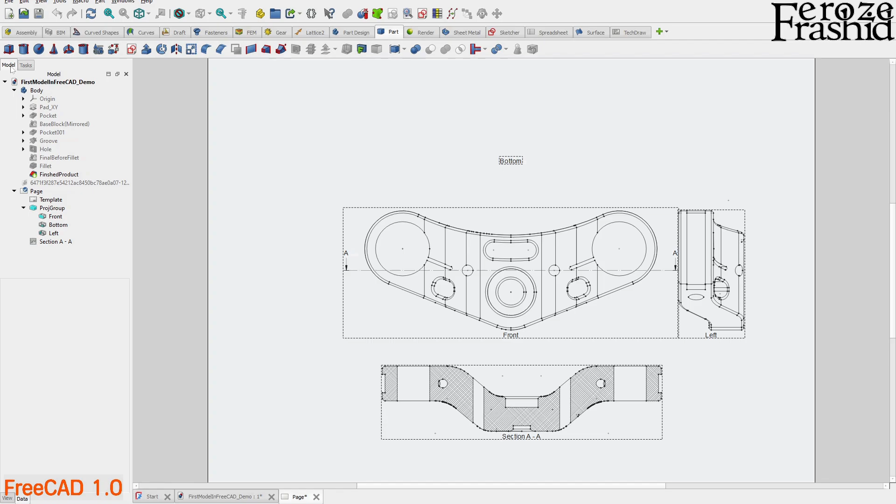Go to freecad.org/downloads and download your version of FreeCAD 1.0 for your computer.

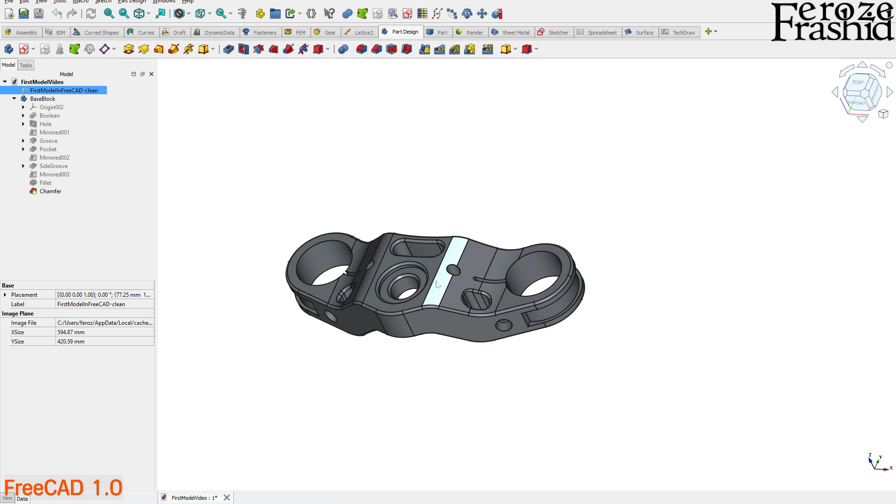Welcome back. So far in two videos we have discussed how to build this model. First we built two sketches on XY and XZ, on the top and front plane. We used the common area between those two extrudes, and then we applied some dress up features, and that gives us our final object.

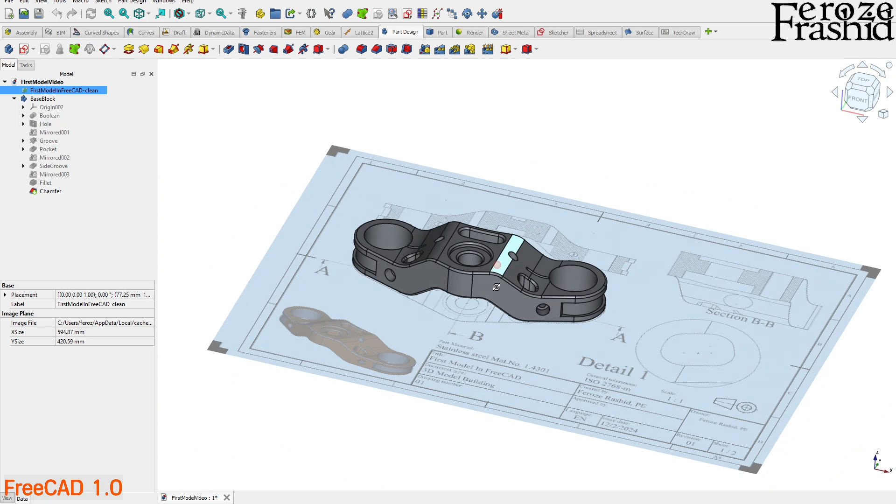So in this video, what I am planning to do is show how to build this technical drawing from the model that we just built. So first we used the technical drawing to build this model. Now, what if you build the model, you came up with this model, and then you wanted to document that specification in a document? So that's what we will be doing.

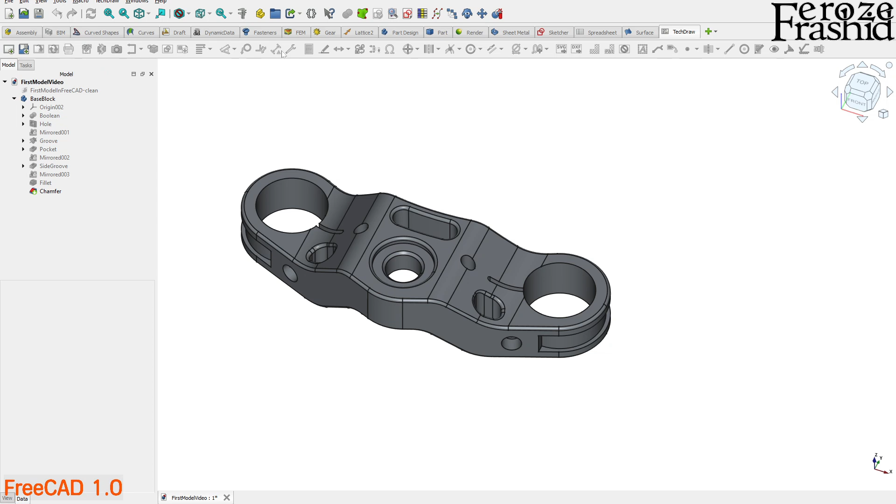FreeCAD comes with the TechDraw workbench installed in it, and that's what we will be using to build our technical drawing. The first two buttons in TechDraw: the first one says insert default page, and the second one says insert a page using template. So it looks like we need a page nevertheless, because the other buttons are grayed out. So let's start with insert a page using template.

So these are all the templates that come with the default FreeCAD installation, and those are saved in this location on your computer. So once you select your template, you can open it, and that will open up the page that we will be building our technical drawing on.

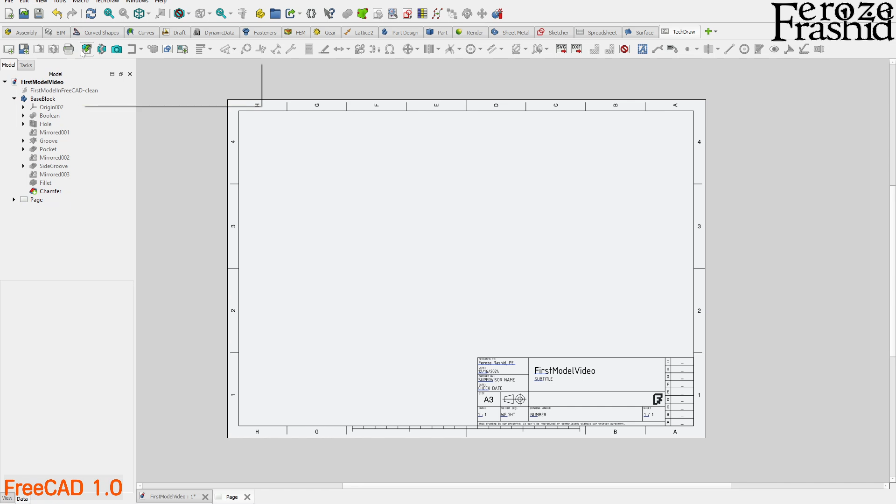We will jump into building this model. The first thing we'll have to do is insert view. There is this button on the toolbar, the sixth button from the left, and it says insert a view. So without selecting the model, if you click on there, it will give you the chance to import an SVG, a vector image, into your technical drawing.

Say I wanted to bring in my logo in there, so I can navigate to my logo folder and bring it in. We can do that, we can bring in additional vector images in there. So how can we bring in this model into our technical drawing?

We can select it and get into page and then hit image. Oh, it didn't work, because it is still giving me a chance to import an external image to the environment, but we don't want that, we want this model to be in there. So I select it, I go to page, this one becomes deselected, and that's why it is not bringing in that image here. The trick is, the left panel does not work very well in this scenario.

What I want you to do is select this model, this chamfer, the last in the progression, and then look at the bottom of the window. There is 'first model video', that's the file name that we are working on, that's the one. And then right next to it there is a page.

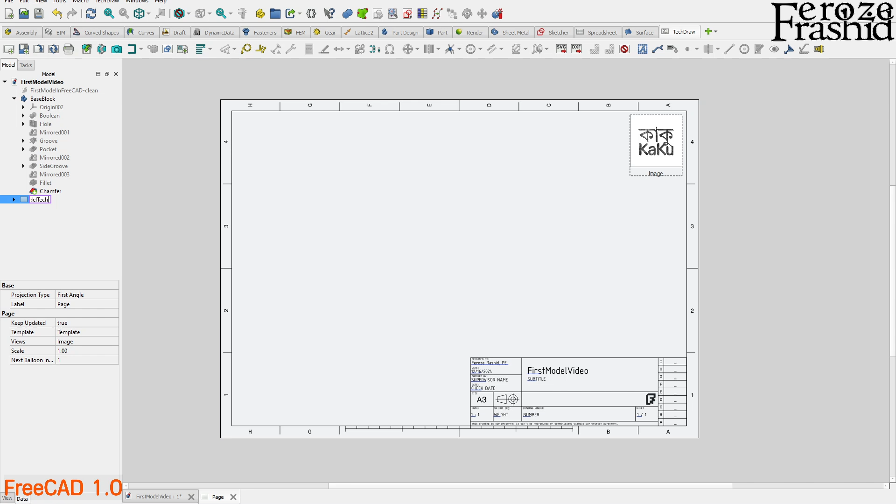So this is the page that shows up at the bottom of this screen. What I want you to do is rename that page, say, 'first model TechDraw'. As soon as I rename it, this one also gets renamed at the bottom of the screen, so that means that's the one, the same thing.

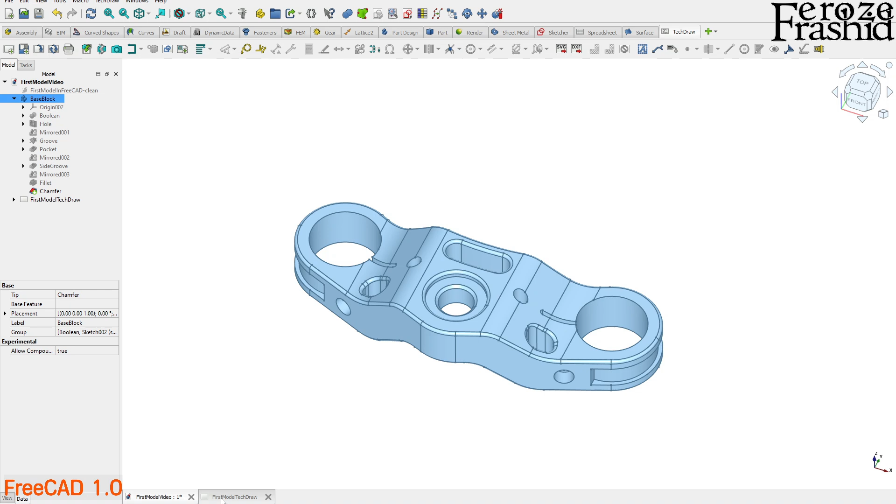So what I want you to do is go over to the chamfer, select this model, and then not from the left panel, the tree view, go to the bottom of the screen, select the second tab, and then hit insert, and give it a second. If it is a complex model, it will take a second to show up, but without seeing anything, I would not click in it. All right, there it is.

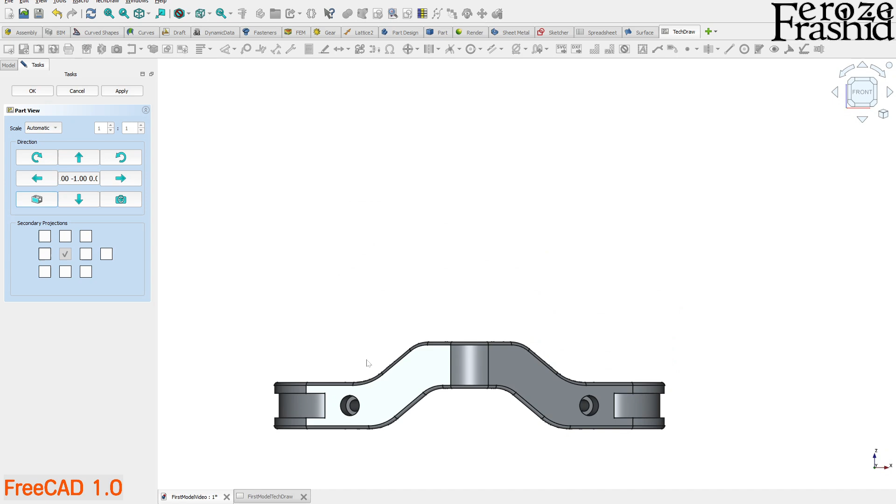So we have our front view. Now we can go over there. So this is the front in the model, and that's what is showing up as the front, right? So the front view is showing up here. That will be the center of our technical view.

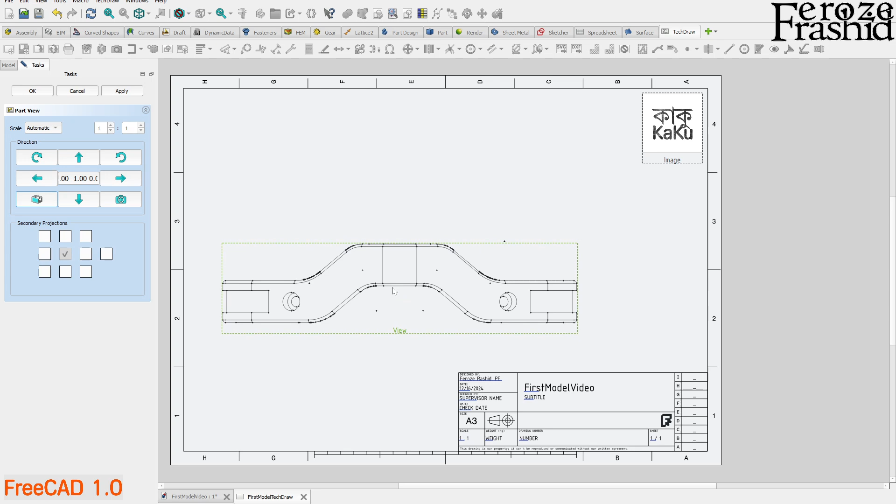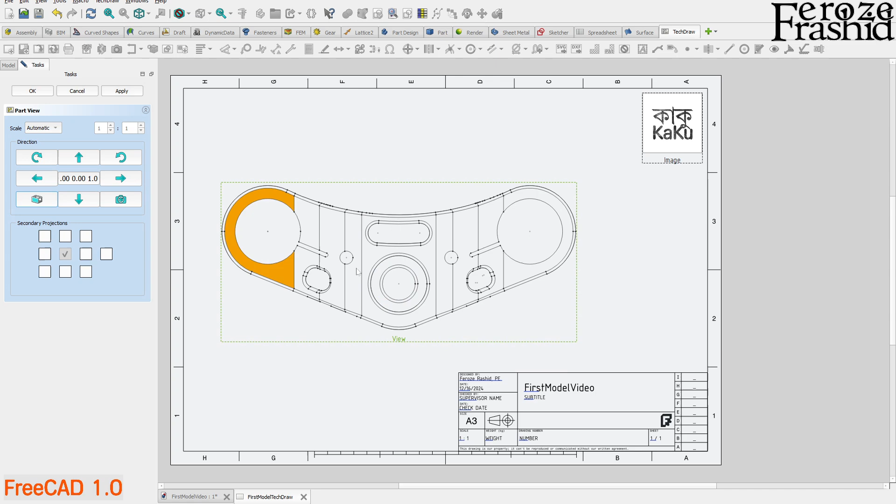If you wanted to have anything else centered, for example the plan view instead of the front view, you can click on the arrow from the part view. That will cycle through different views. Go up and down to switch between top, bottom, front, and back. Now I have the top view, so we can see the fillets and the chamfer in there. That's the top view.

I want to add, in this view group, the front view at the top. I click on the secondary projections, and it pulls in the front view. It says bottom, which isn't that important right now, but the front view shows up. We can see that from looking at those front two screw holes. If you wanted a side view, you can select one of the right or left side buttons from the secondary projections as well, and that will give you a side view.

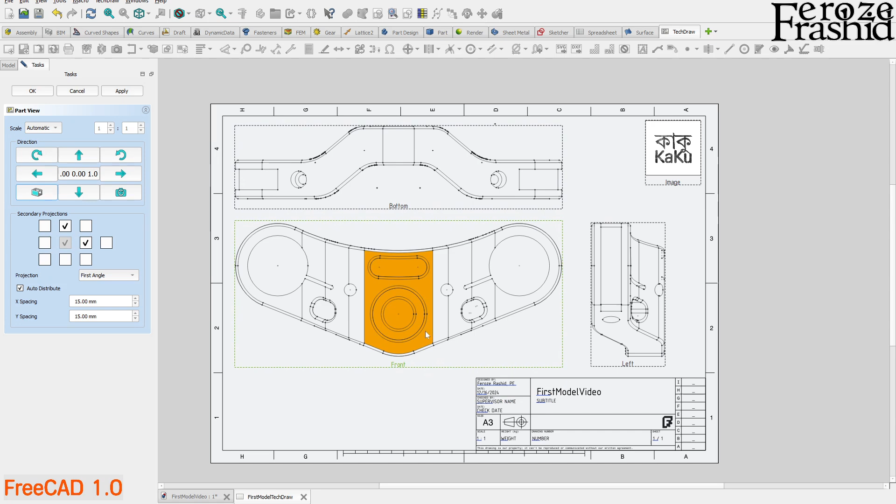Now out of these three views, if I drag on the bottom one, it will go up and down. If I drag on the left one, it will go left and right, but the left one will not go up and down, and the bottom one will not go left and right. To relocate the whole object, you can grab the center one, the first view that we added, and drag it to move it around.

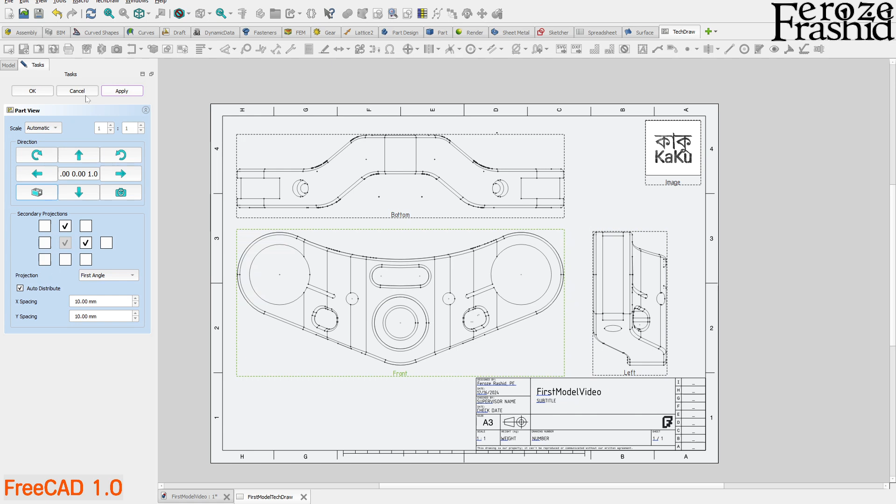You can also select different scales here. It is automatic, so whatever you have will be compressed into one page, but if you wanted a custom scale, you can do that as well. These two, X and Y spacing, actually control the default gap between these two views. I'll make it 10 for demonstration, and you'll see them moving around. All right, hit apply and OK, and now it is moving around.

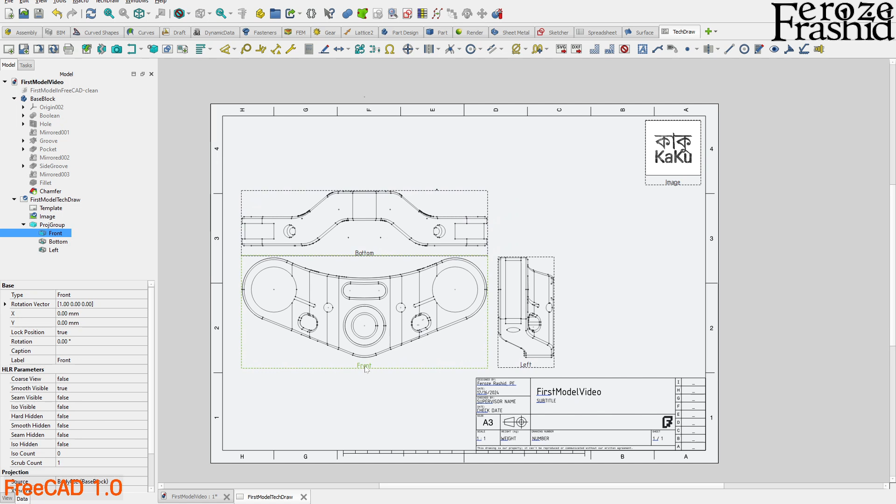That 10 millimeter gap is corrected once you get out of that window. Since it's automatic, things are getting corrected because it's resizing in there, so it's not one-to-one scale anymore. Because it's a complex model, it's taking a second to compute everything, so be patient with this model when working in TechDraw. Now we have all the views in there.

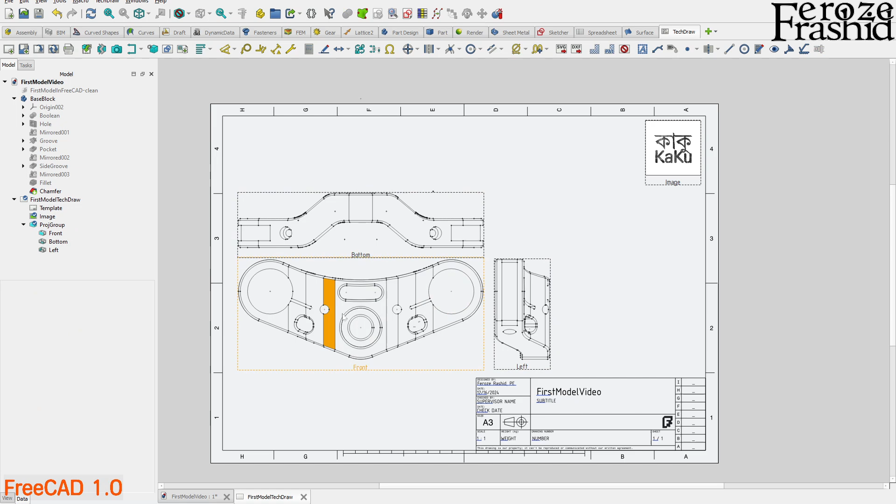Now let's talk about the cross-section view. At this vertical face, we can see that there is a chamfer and a fillet in there, but we actually cannot see them in these views. We know those features are there, but none of these views are expressing that. So a cross section helps you understand, by going through the middle, what's going on in there.

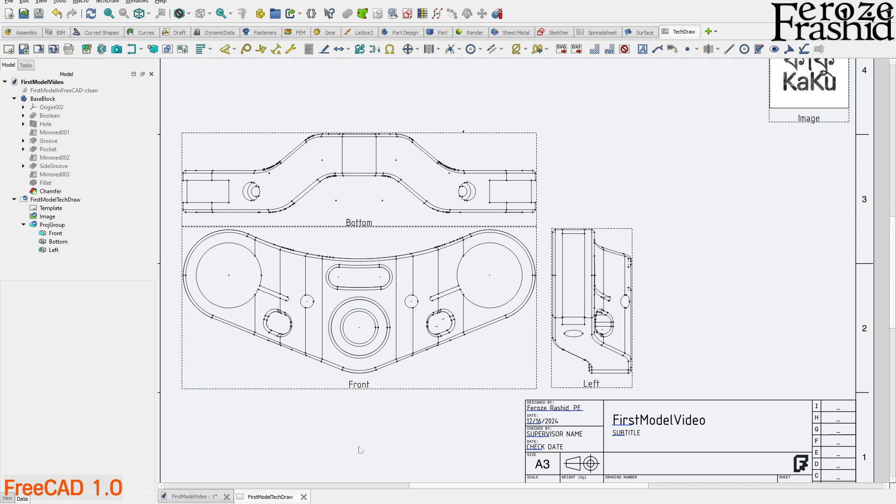So what I want to do is draw a cross section here in the Y direction, this direction, up and down. Select the front view, then go to the toolbar where it says insert a simple or complex cross section view. Today we will only be working on the simple section view, so I select that.

Before we do anything else, we have to pick one of these four options. Since we said we'll go with the vertical face, up and down, I'm going to select one of these two. Let's try this one. After selecting one of these four options, go all the way down to the window and say live update, and then it will show me the update, stacked into there in the middle.

I can drag and move it around, maybe somewhere here. That shows me the cross section that goes through the middle of the body in the shorter dimension, not the longitudinal direction. Now I can say identifier A, so it will be cross section AA, and that will reflect in this view. It looks fine to me, but if you wanted to rotate this view around, you'll have to do that later on. Just keep that in mind, since sometimes you want to rotate it around, and we can do that as well.

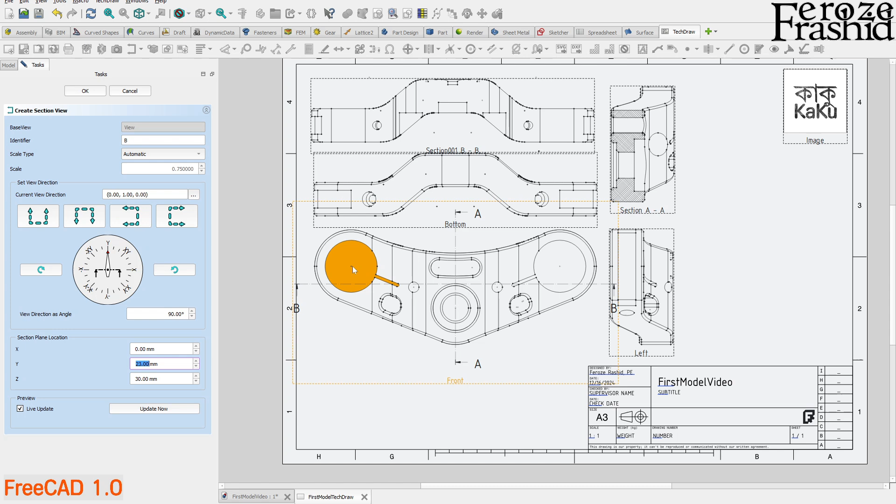So if you update the Y section, now it is at 20. If we want to go over there, if we knew the coordinate of this center, we could fit it in there, and that would draw the cross section through the big circular holes. We could do that, but I'm not going to do that. That option is there for you to consider.

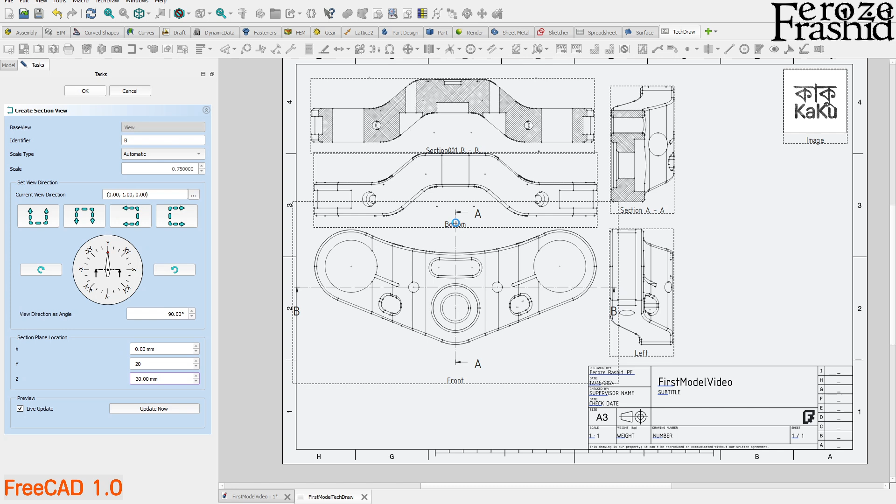All right, so we have all of our cross sections that we wanted. We have this view section group, and now what I want to do is move this object just a little bit on the right. Remember, it was 15 and we made it 10, and then it moved on the left side. We want to reverse that action.

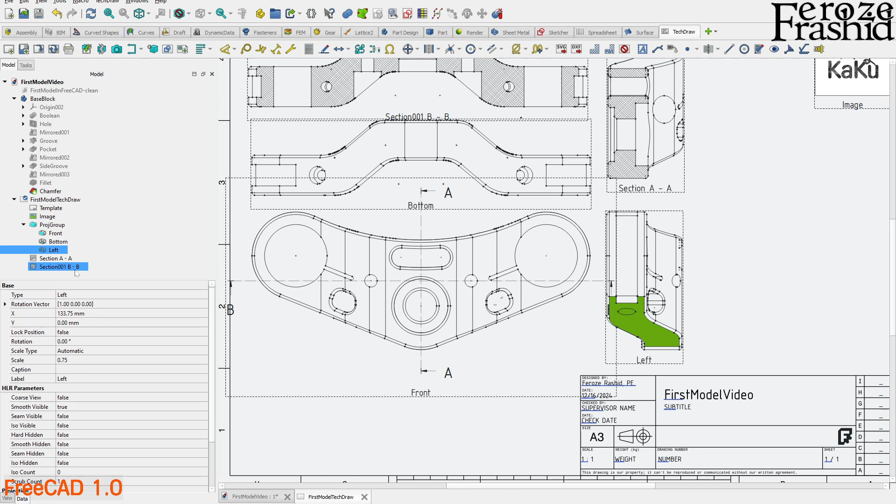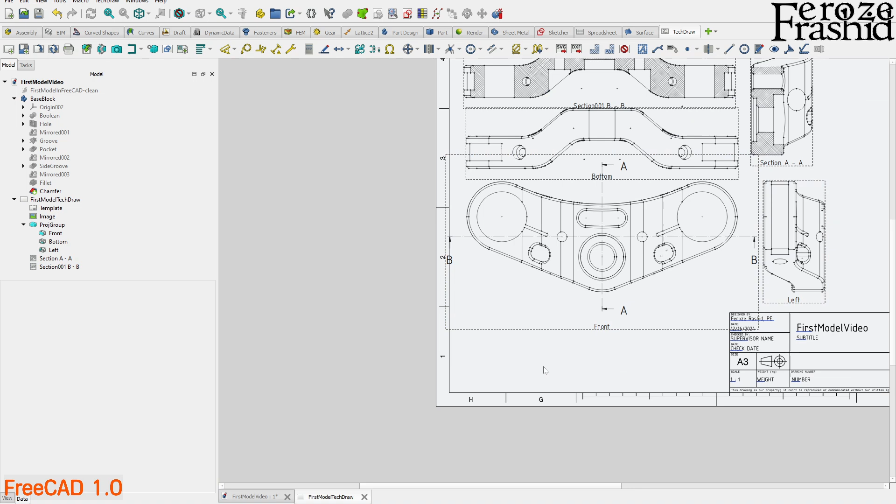So select that view on the data panel, and here it says, actually we want to go to the projection group, and here when it says spacing X is 10, we want to make it 20. It moved over 10 millimeter on the other side. And that's because we did it through the projection group, because this view belongs to the projection group, right?

How about this one? How can we move it over on the side? We can actually drag and drop it over there, and that works too.

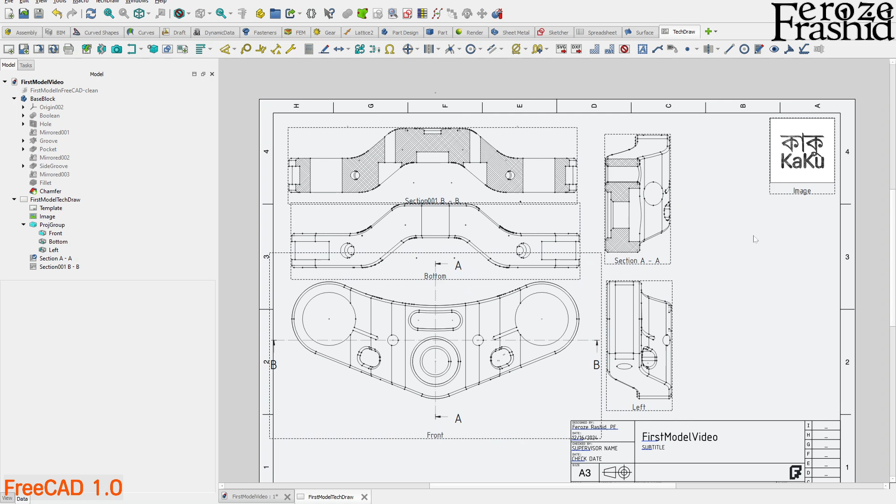And then I have another open portion right here, and maybe I want to put in the three-dimensional figure in there too. So let's see, let me align this just like that, right? And keep it selected, right? And go to the model.

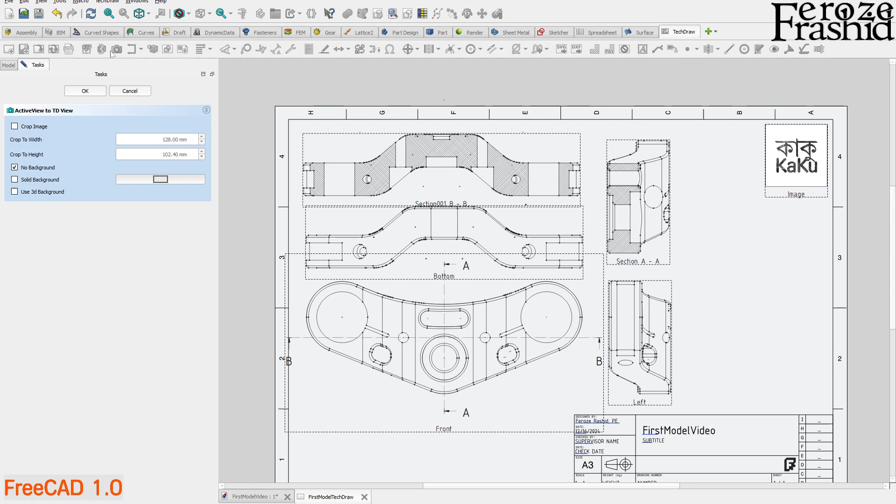At this time, we don't want to do the insert a view. We want to do the active view, the three-dimensional view. And I can also crop it, but since I didn't select it, know that I'll have to update this value later on. There, so there is my three-dimensional object.

It can be also placed in my technical drawing. Sometimes having the three-dimensional object in there helps as well.

So this one, now when I said cropping, looks like it's a little wider than what I need. It doesn't hurt, but if you wanted to correct those, on here in the image under the data panel, on the width when it says 128, maybe give it 85, right?

And it doesn't hurt, we can actually change the size of this image individually irrespective of the technical drawing part here. So we can say scale type custom, right? And then when it says custom, and then where it is 1, let's try 1.5, and that kind of zooms it just to make it a little bit bigger.

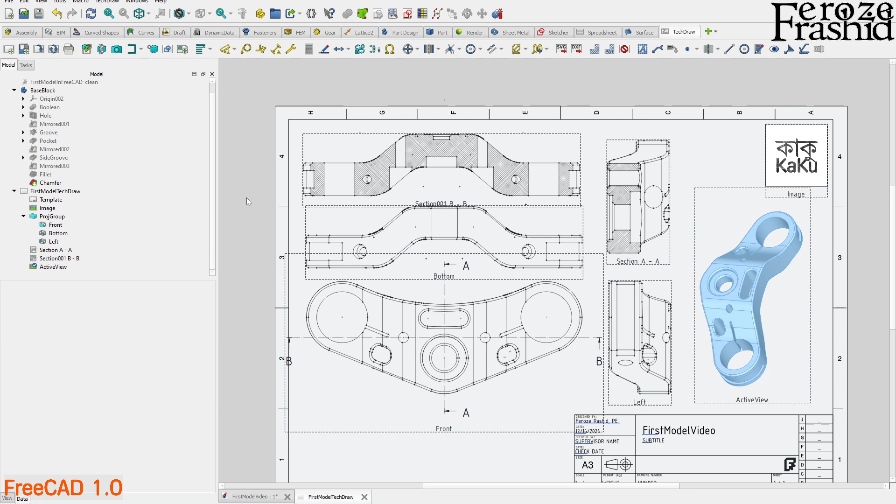Now we'll have to update our cropping values. On the height, it is cutting down, so maybe 150, right? Yes, there is that. So now we have constructed our technical drawing.

And if you click on this button where it says turn view frames on and off, if you click on that, if you turn it on, this is the final view that we will be looking at when we export this technical drawing, right? No dimensions. We are going to talk about that, the dimensions, in a minute, but the additional vertexes right here help us fixing the dimensions up there. They won't be showing up in the final drawing.

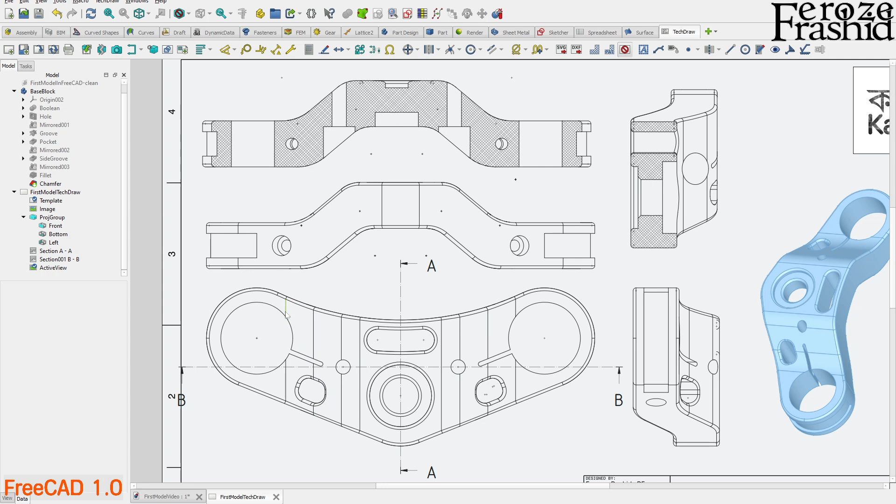However, these lines are showing up. I talked about that briefly in one of my videos when we were working on this plane. This line, this line, and this line, all four on the left and four on the right, I don't think they should be there. If we are not differentiating between two different planes, there should not be a line showing up, right? So this edge represents that the face right here and this face right here have a difference in elevation, and that's what this edge represents.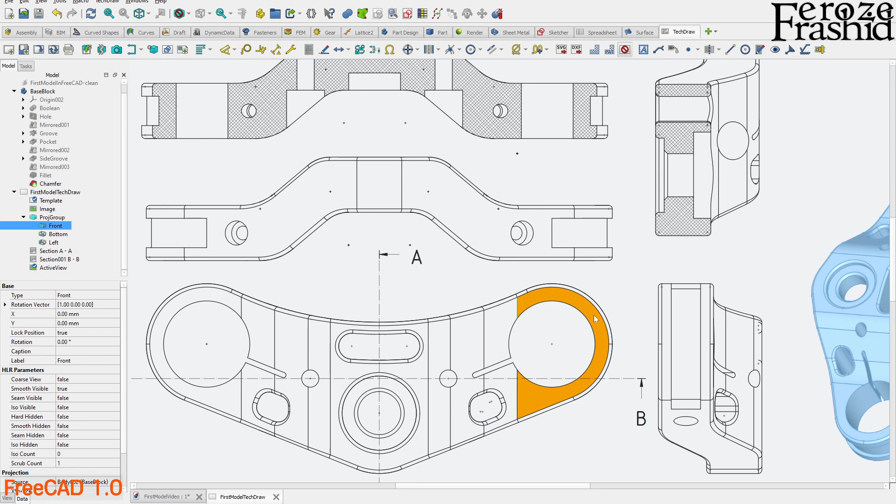There is no jump in elevation between these two faces. There is a curve there, I know, but that's not how we want to see it in the technical drawing. The curves are represented there, but that's not how to do it. So I want to hide these lines. There isn't a better way—I'm sure FreeCAD folks are working on it until that's been resolved, right?

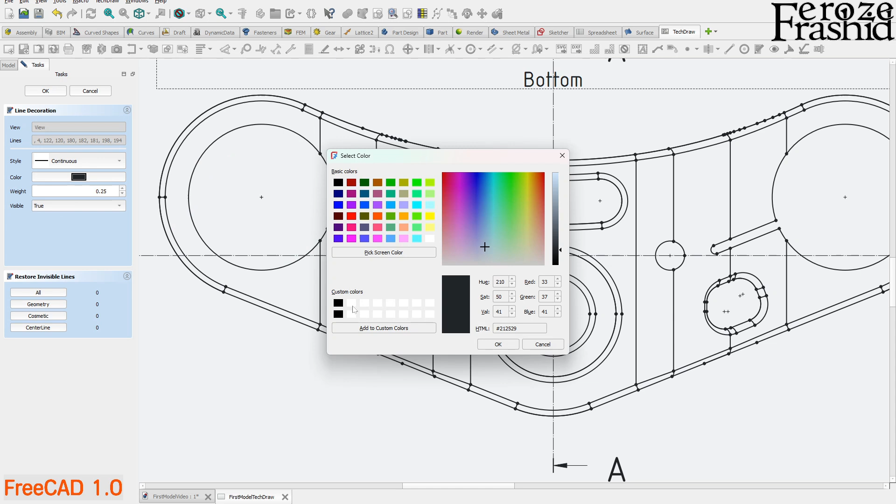What I want to do is select all the lines. So I selected all of these, and there's a button that says change appearance of lines on the toolbar. Select that, and for the color, maybe I say no color, like white, right? I wish there was a no color option, but white works too.

So on this cross-section view, I think it's appropriate to have all those lines, but on this front view, they also have like 2 or 3 unwanted lines in there. All right, so you can now hide unwanted lines. It's a workaround again—maybe better days are coming on that part.

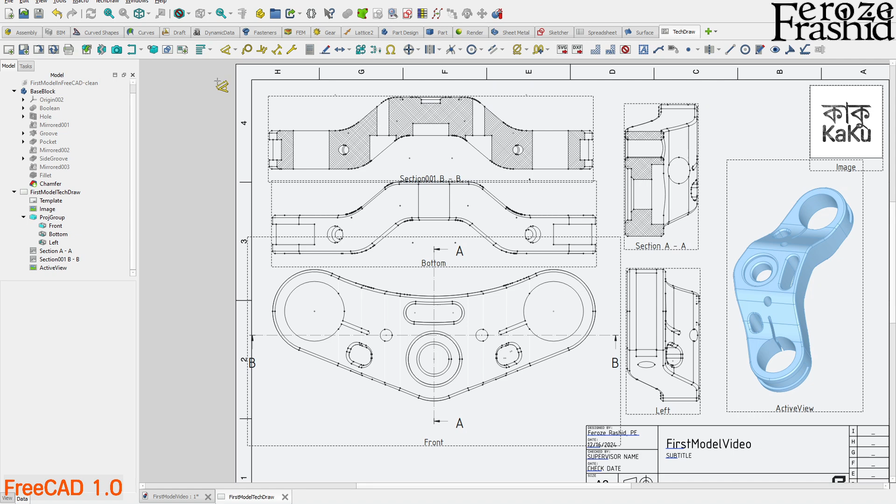Now let's talk about the most important part of a technical drawing, dimensions, right? So here we have the dimension, but know that it doesn't work with the keyboard shortcut D like it did in sketching. You'll have to press the button. Once you have this activated, come over and select an edge, and it will give you an appropriate dimension. If you don't think this should be labeled as radius 25 and you want it as 50 diameter, you can select the edge, go underneath the dimension menu, and select insert diameter dimension.

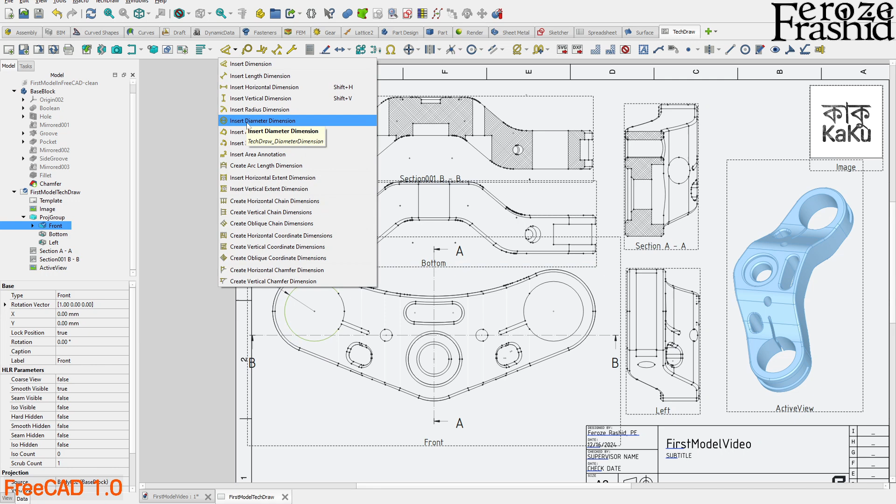Say I know that this was 200 millimeters—yep, that shows up as 200 millimeters. Having too many views in there kind of becomes challenging to work with sometimes. I know that this was 207. Ooh, it's showing up as 205. Maybe I missed it somewhere.

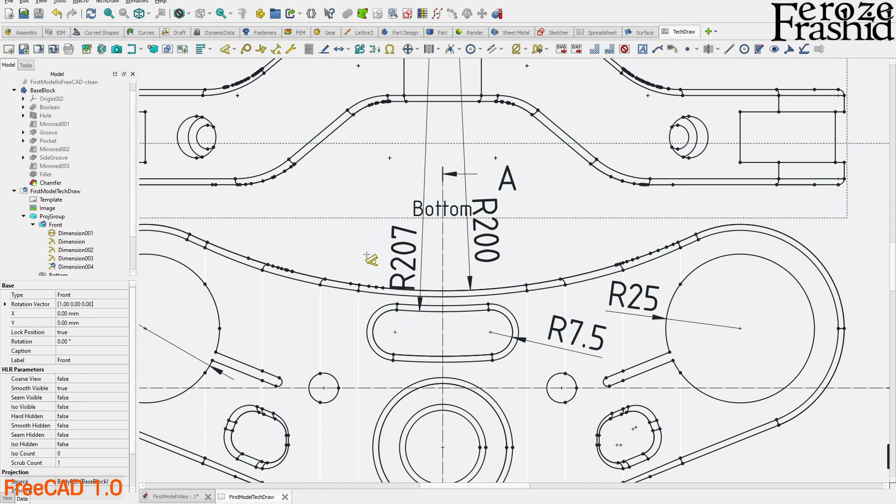Because that is the edge of the fillet, that's not what we're supposed to select. We are taking the inside, the actual hole. So that is 207 there. Yes, if you have fillets and chamfers in your model, we'll have to be careful about which edge we're picking. For example, here I don't want to pick the outside because that's not representative of the hole that goes through.

And then you can select one edge, or if you wanted the distance between—the height of this overall object was 32, I believe—select these two points using the Control key, and then while they're selected, hit dimension, and that will give you the distance between those two. So you can activate it and then select the edges, or select the edges first and then click on it too. Either way is fine.

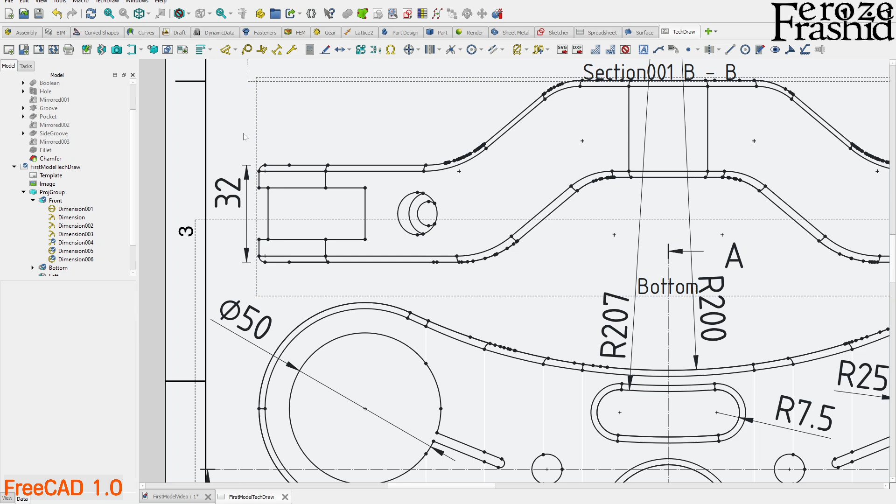And so that's the dimensioning. I'll let you finish up this document on your end as practice. I'm not doing any more dimensioning on this, but you know how to do it. That's the point.

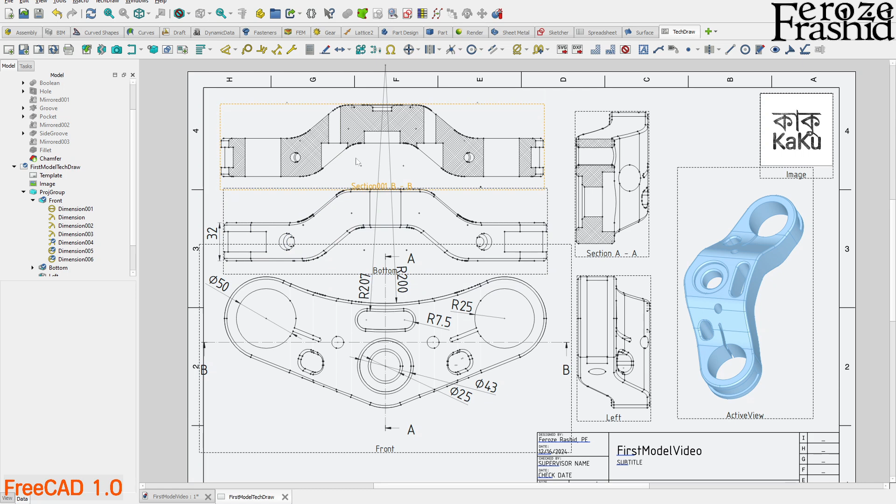One thing that I haven't talked about is in the cross-section view. It has some patterns in there, and some of them are like blank or white spaces.

If this is the first time you're coming across a cross section, know that's how it's supposed to be. The hatched pattern means those are solid material in there. So this is the BB line it's representing. At some point it goes through the groove we built, then through a solid material, and then into the empty space created by this cylindrical hole. So those are the representations that go through this cross section.

So if you see empty space, know that that's empty material - there's no material, that's a void.

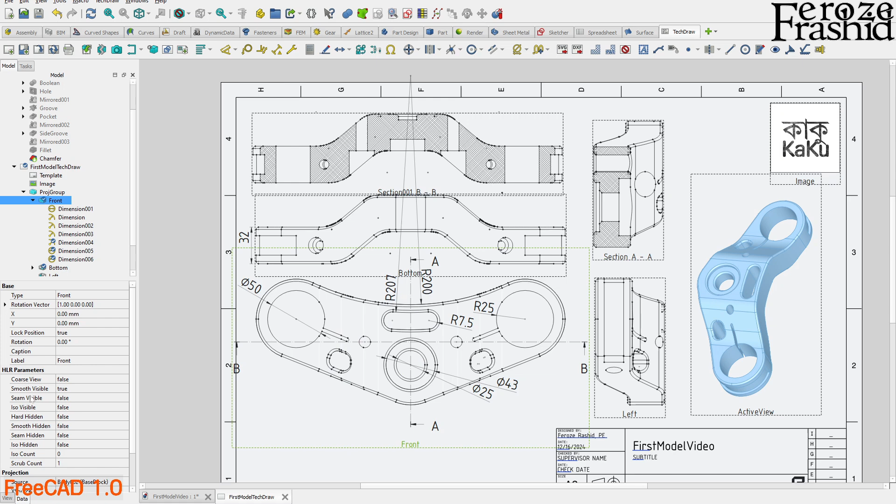I mentioned just a minute ago about not having the invisible features displayed on this cross section. We can have different kinds of lines representing our hidden features. So select this object, this view, under the Data tab, under HLR parameters, come to the Hard Hidden option and make it true. Now it shows up the hidden screw holes we built and the hidden groove we built in there. That is important.

We want it on this one. Let's try that on this view and see how it appears. We select that view, go under HLR parameters, Hard Hidden is false, make that true, and there it is - it shows up. Look how many hidden lines are there.

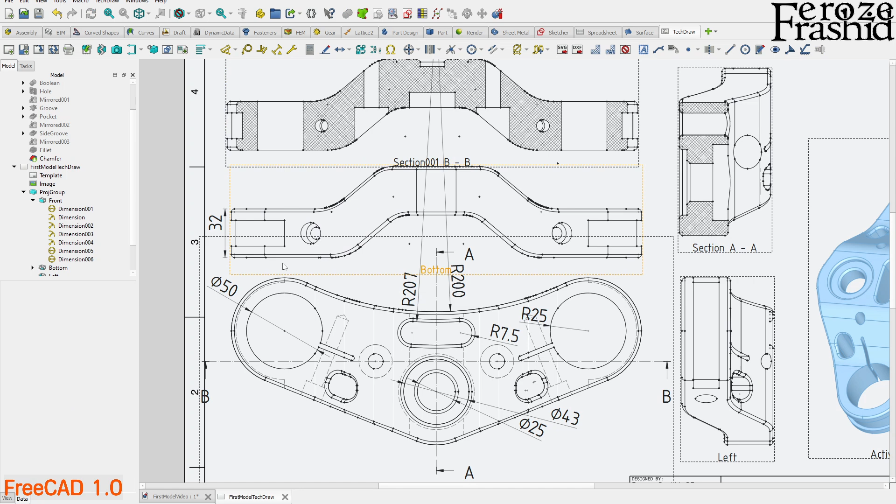We don't want all of those lines. That actually makes it too busy to look at, and sometimes it loses its purpose. So for this cross section, for this front view, I don't think the hidden lines are the best thing, so I don't want to do that in there. Hidden lines have their places - sometimes they're very important, sometimes you don't need them.

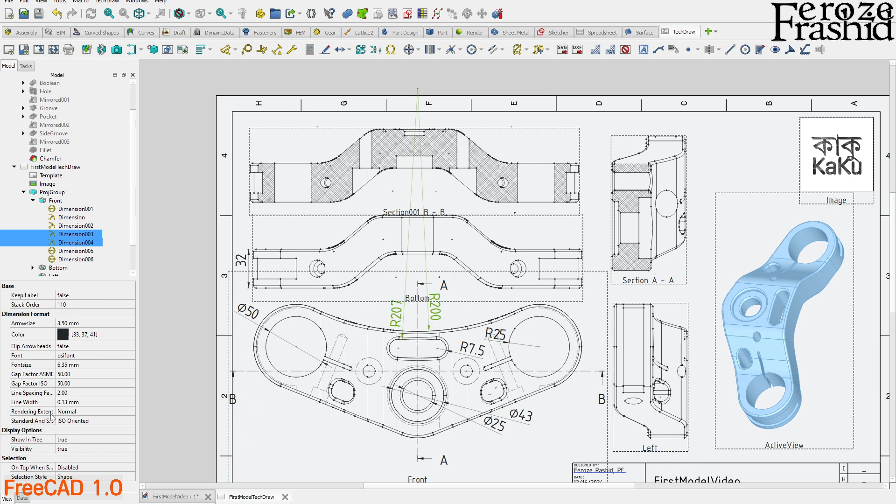Customization of these dimension annotations - say 200, there's the center, it shows the center outside of the page. It looks really odd. For this 200, this 207, we don't want that line drawn all the way up there. Select those dimensions you don't want drawn in detail, and then go to View, and over here it says Rendering Extent, it says Normal - we want to say Minimal.

And that kind of makes it minimum. We can also do that on these dimensions as well. Let's try this one - select those two and go to Rendering Extent, Minimal, and that minimizes the arrow we just drew.

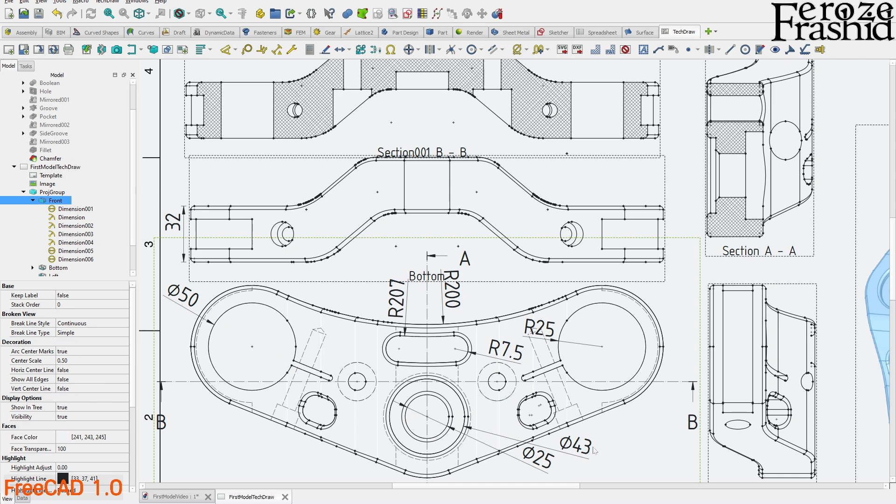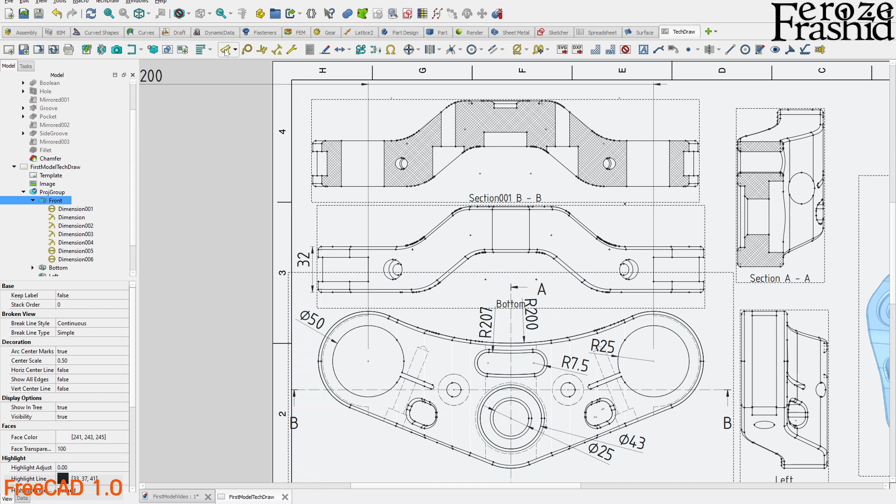The same idea can be applied on other types of dimensions as well, where you see it fit. On this length, I'll show you another example. Say I want to show the distance between this center and this center, so I selected the centers of those circles and activated the dimension tool. It shows up somewhere here. You see how these two reference lines are going into the odd - it looks odd, right? What if I wanted to shorten those two lines?

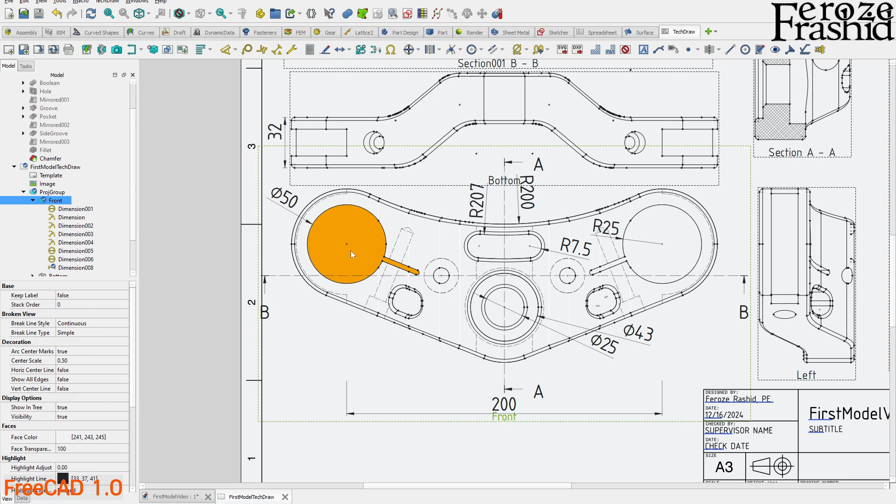We want to select that and come here - it says Gap Factor ISO, it says 50. You can change that value from the preferences; the default I set up as 50, which works fine. But for this specific one, let's make it 400, and that measures the distance between this point and this point as 200. The more you make it, say 500, the longer gap it makes between the point and the reference. So sometimes that helps too.

Those are the basic tips and tricks I use to create my technical drawing. Once I'm done with all of this, what I do is turn off the dots and see how it looks. If it looks all right, I can export that as an SVG.

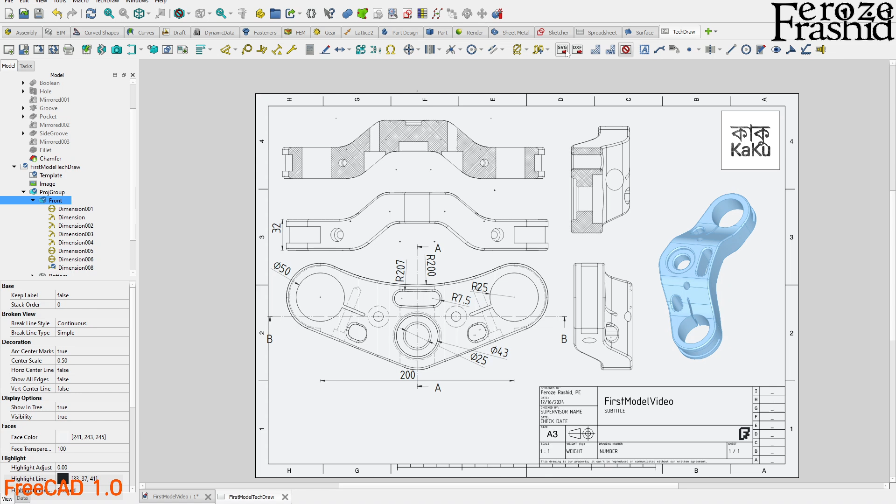If I export that as an SVG, I can open it up in Inkscape if I want to do further modifications. Or I just save it as a JPG or PNG image file. Or you can take the whole file and export that as SVG, or there are multiple other formats - you can export this as a direct PDF too. So you can take this technical drawing, print it out, and send it to someone else - they will be able to recreate your model.

All right, so that's the technical drawing initial setup and preparing the drawing, and then exporting it to use. So that concludes the technical drawing part of this video. Now I want to talk about the different design philosophy, how we can do the same model in different ways.

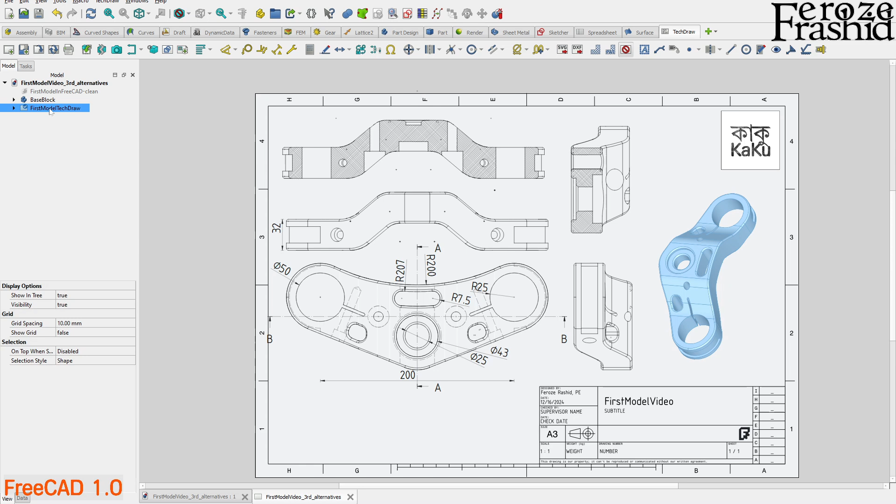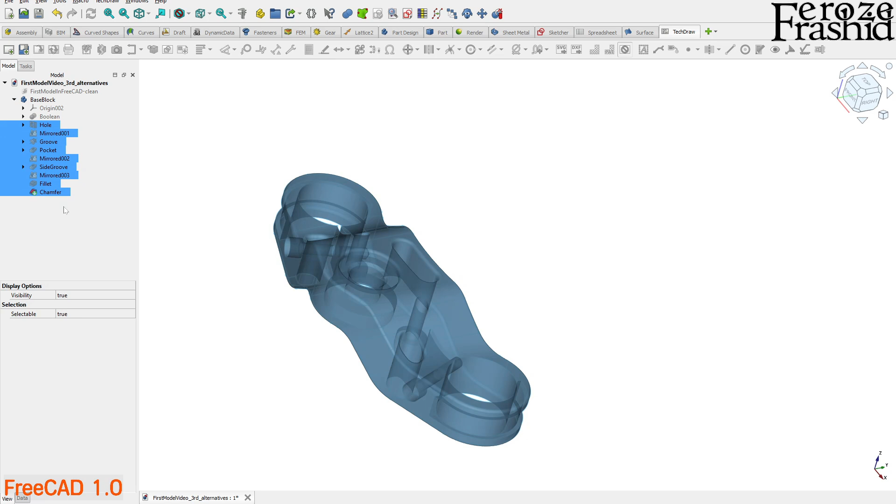I'm going to go ahead and delete this technical drawing. We talked about technical drawing, and I think we are at a good place. We have this base block that we built over two days, and I want to delete it. All of this after the boolean will be the same for all the alternatives, so I'm going to delete those, because if those remain the same, they don't need to be talked about in the alternatives. I want to delete this boolean too. If you remember where we combined these two extrudes, I want to delete that, so we don't need that base block anymore.

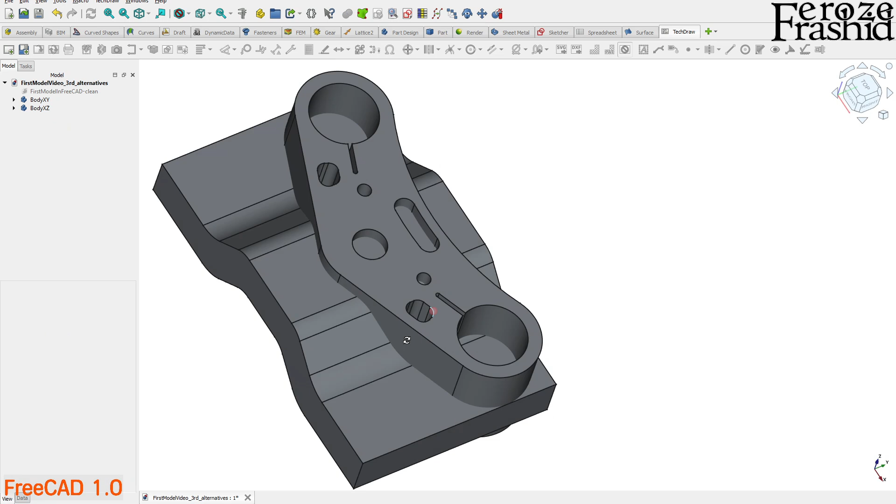So these are the two products that we had from our first two sketches. This was one of the sketches, and this was another sketch.

In the popular method in part design, it's not common to find the intersection of them. That's not the popular idea. The popular idea is to cut things out.

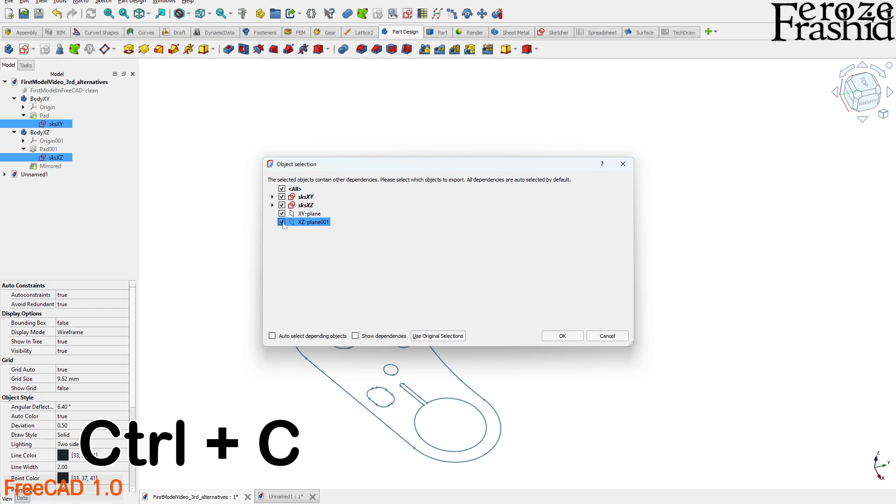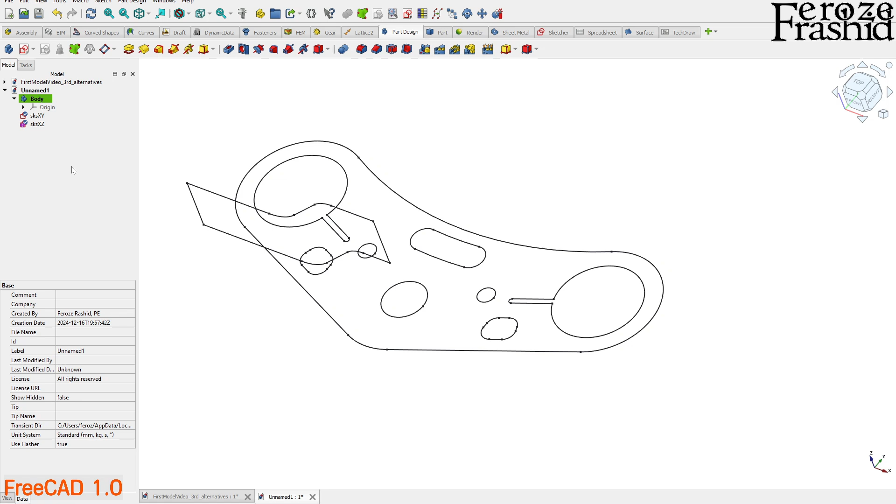So we can actually reuse different sketches. We can do that, it's easy. Now the popular method, the popular work philosophy in part design, is to actually build things out one upon each other and then cut things away, and at the end it will be one final object. In our video, what we did was build two bodies and put them together as a common.

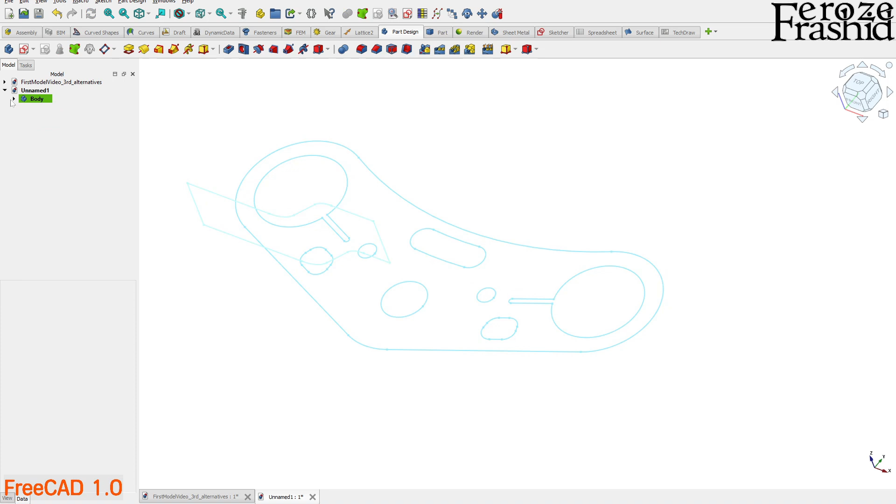Let's talk differently. So what I want to do is take these two sketches and put them into the body, so now they belong to the body. Here I will start with the XY plane. I will pad it up just like previously. I want to go with two dimensions, it doesn't hurt. Then I want to go up by 70, down by 10 or 5 - I think we did 5, so we'll keep it at 5.

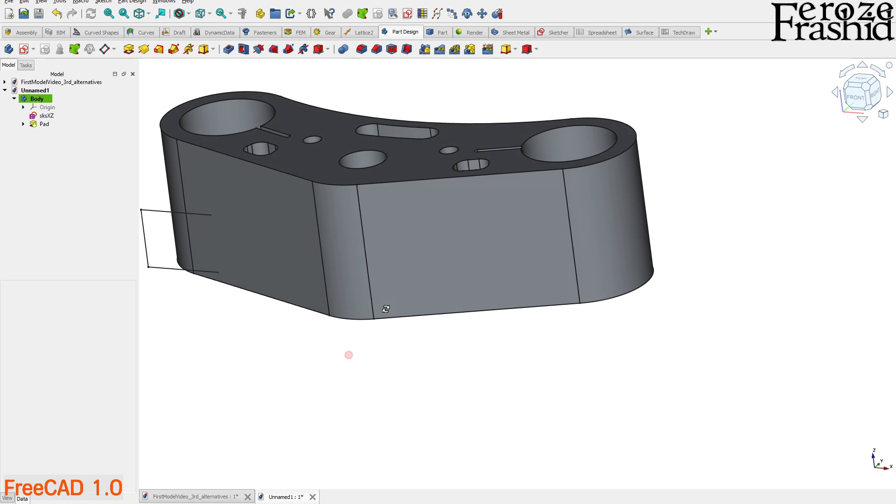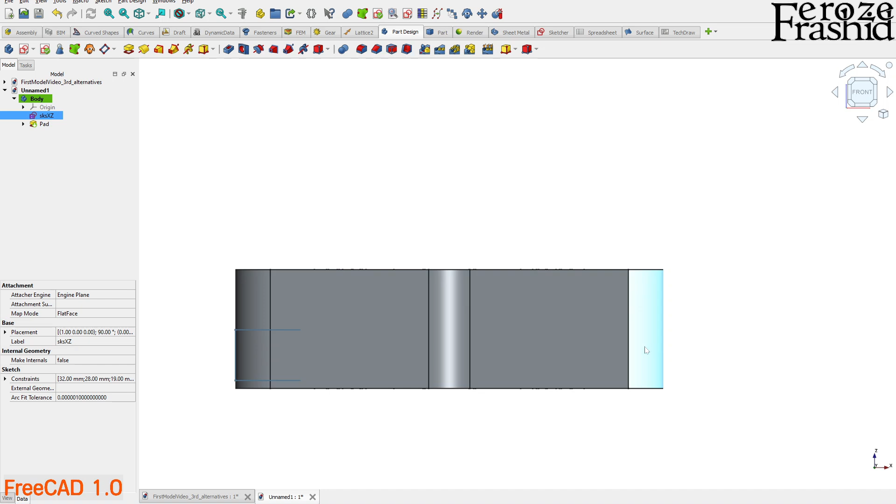So that's my first. As I mentioned earlier, because it's the same model, if I do anything on this model within the same body, it will be added and subtracted by default. I can cut this extra middle part out to make that middle body. Previously we built this sketch to contain and keep this much area. Now we're saying that will be saved anyway - we just want to delete this extra part. So we'll have to modify our thinking on the sketching.

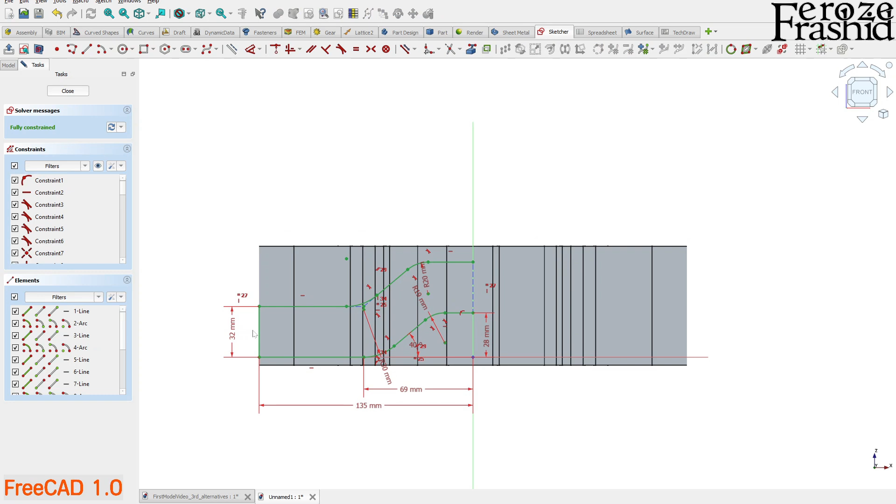Let's make this one construction geometry. Remember, if you make a line construction geometry, it will not show up in the final sketch. Now we have these two lines, the boundaries. If I can close this shape up and close this shape up, we can use that to cut things away. So what I'm going to do is take this polyline and make it like a closed wire - that's the technical term.

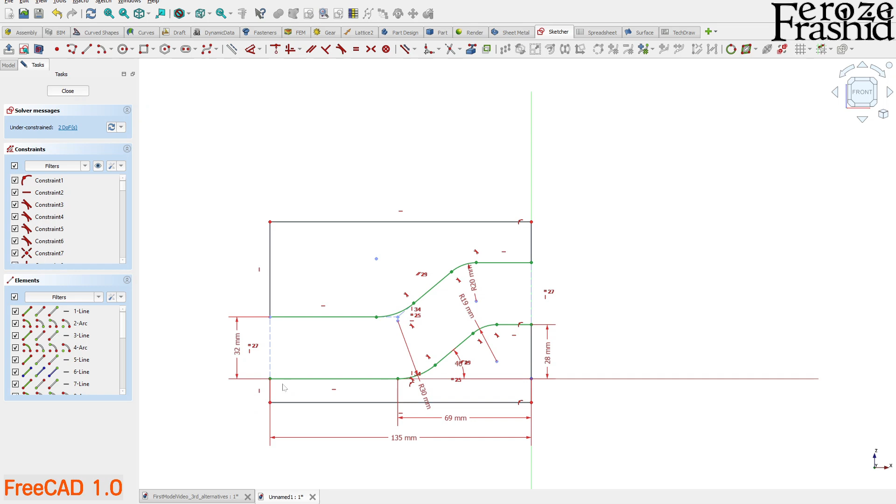I think it came down 5 millimeters, so I'm going to make this lower part - it doesn't matter, it can go more than that. As long as it's more than 5 millimeters, we're fine, so we'll just make it bigger. That's another thing - you can leave a sketch under-constrained, just don't make it over-constrained. As long as it's under constraint it still can work. It's a little wobbly, but it still works.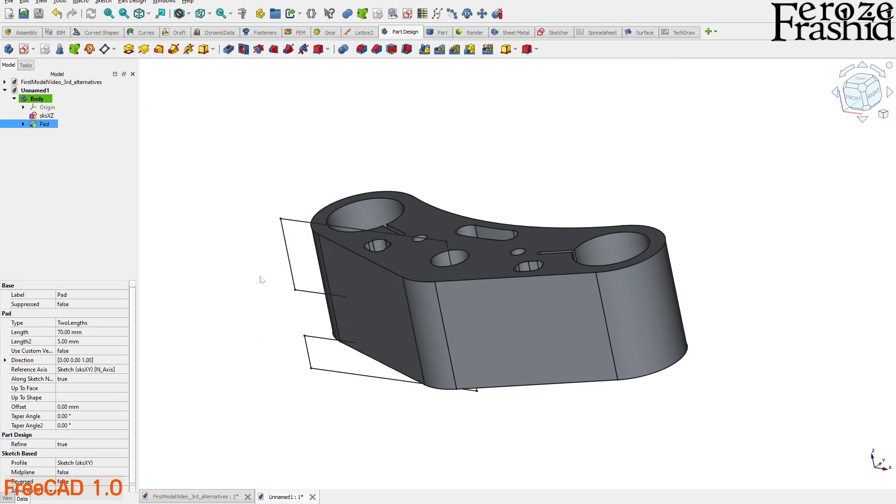So we have this face, right? And if we make a pocket from this sketch, it will start to cut things away, but we'll have to go all the way up and all the way down. It doesn't matter whatever material you have, you'll have to go all the way through it, and there's an option for it - it says through all.

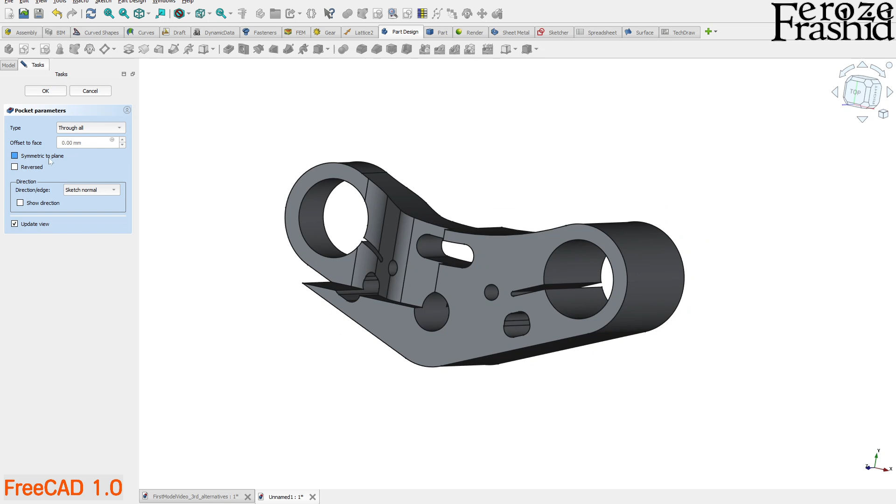So it took it all the way through, but it didn't take it on the backward side. So what we have to do is say symmetric to the plane. So if the sketch axis was right here, now it is going through on the front side and on the back side. There, we hit OK.

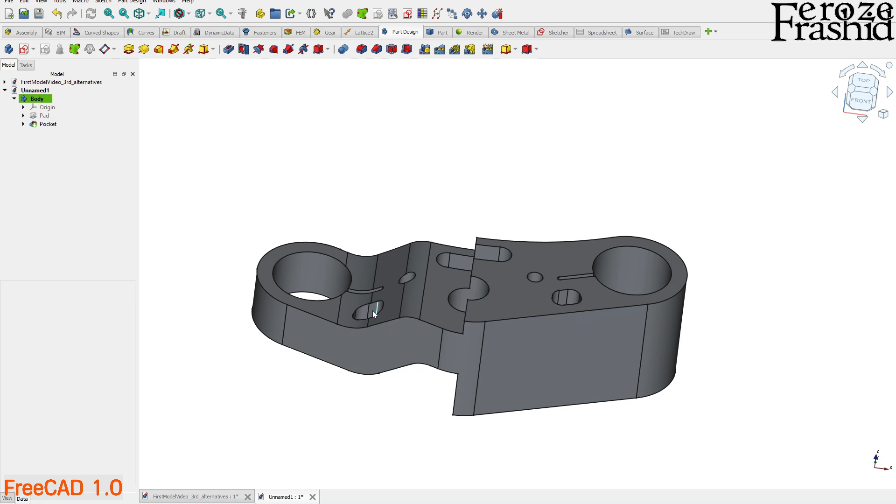So that's the popular method to work in part design. You make the big block and then you cut things away in the same body. Now we have half of the object, so we can make this cutting operation on the other side too. This pocket represents that cutting operation. Although you selected the whole thing, the pad and pocket all together is the body, but the pocket itself on this tree represents only this cutting operation.

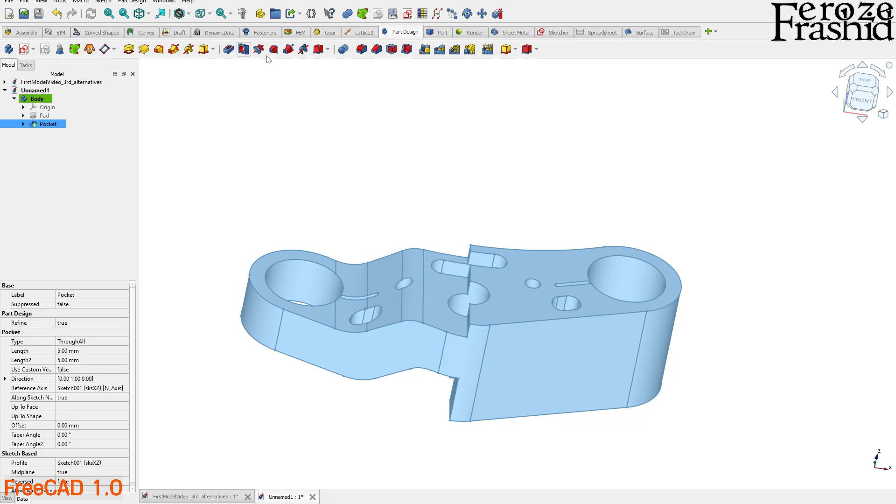So we will replicate that cutting operation on the other side. We select the pocket and then mirror it over on the other side. Now by default it is taking the vertical axis, which works for us. We hit OK. See, so we are using the same two sketches, but a different work philosophy, and we have our model.

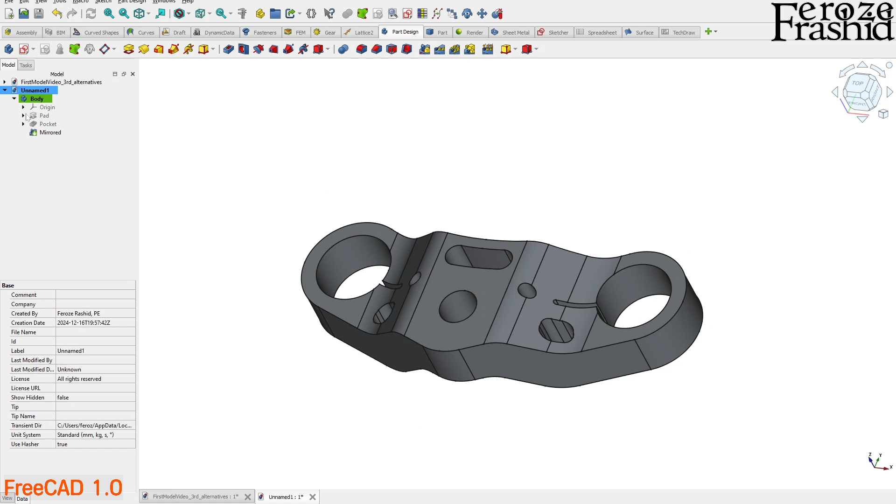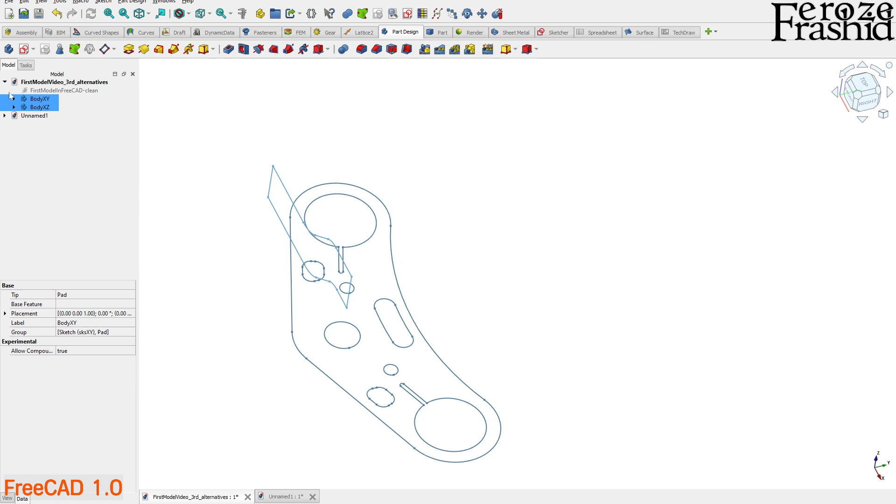The noticeable difference between this model and this model is, although we kind of combine these two sketches, I can still have access to that original sketch. I can do that. But in the common method, when we put this together as a common, those sketches seem to me I cannot access anymore. So that's the downside of having this common thing.

There it is. So, and then we go about our day regularly. We make the hole, we can apply dress up features, but the rest of them are the same, just with a different philosophy.

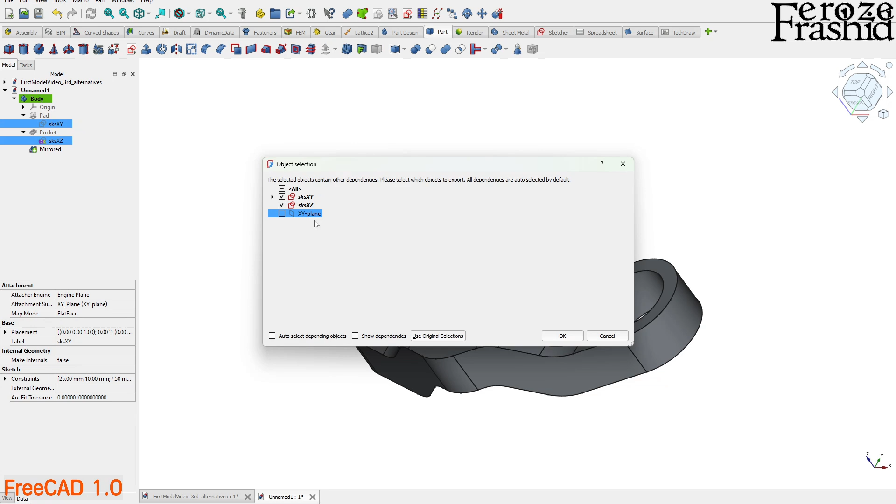Also, I want to take a couple more minutes to talk about part workbench. What if you wanted to do the same thing in part? In part workbench there is no obligation to have everything within the same body. Part itself is a container, so having everything within the same body is not obligated here. I can copy this. I don't need the XY plane. Also in part workbench, you don't need to worry about that plane there.

Let's open up a new file, and in the part workbench I paste this just in there. And now in part workbench, I can extrude that by itself, without having it under the container.

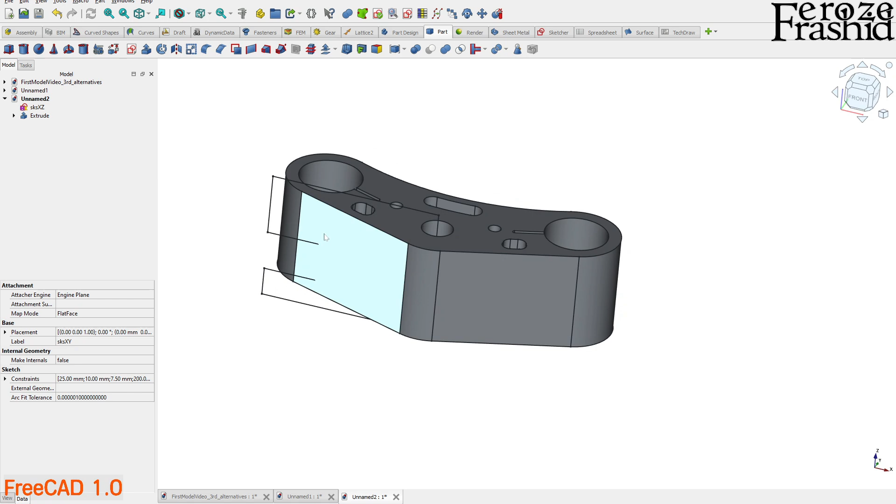And then in part, we'll have to cut things away following the same idea, but it will not cut by default. So we'll have to make it 80 and 80 and apply just like that. But it is not cutting things away — there is no cut button in here. You just build parts and then do the Boolean operations by yourself.

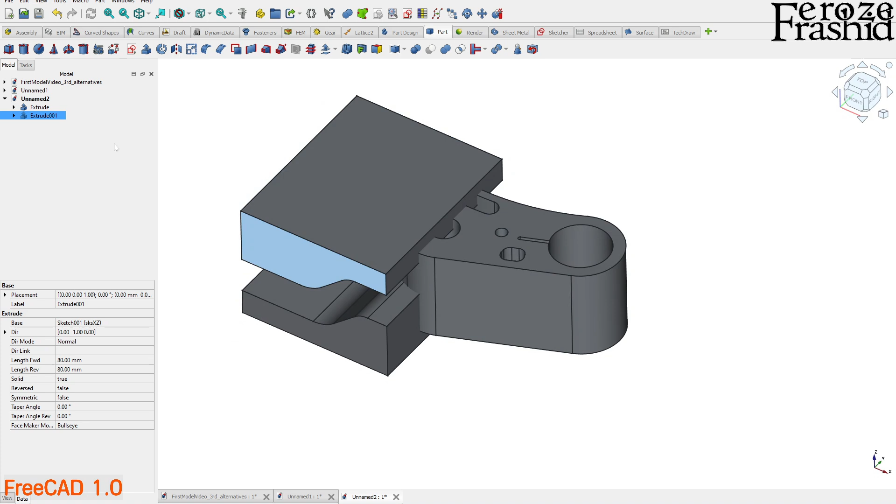So what I'm going to do in part, it makes more sense to mirror it over right now. So I'm just going to mirror it against the XZ plane. And then, although I said these are mirrored, they are not fusioned together. So I'm going to fusion them together using this button here — it says union, right, and that's my fusion.

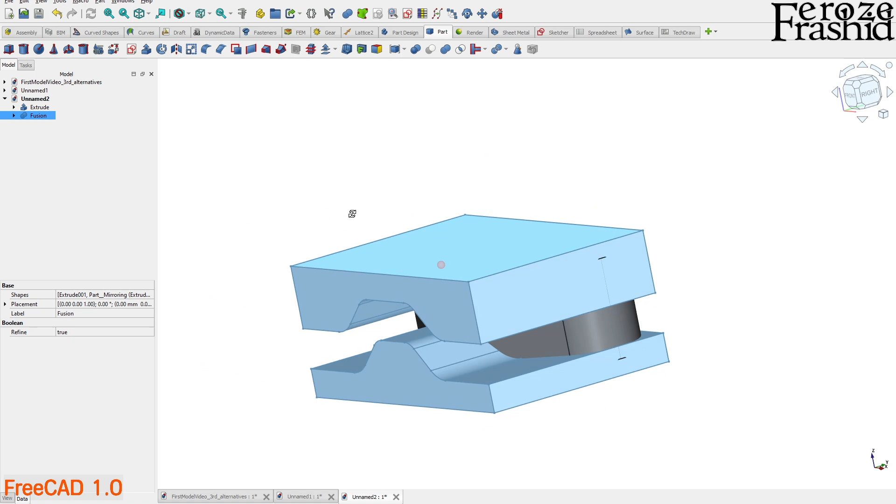Now I can take the underneath body. I can take this one and delete this much of a portion from there to make our main body. So what I want to do is select the one that I want to keep first, and the one that I want to delete, select it as a second, and then hit cut.

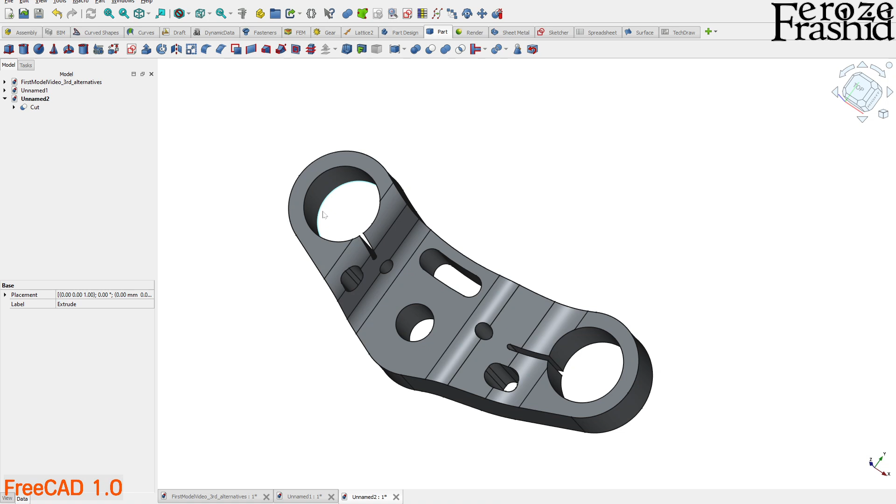So that's part workbench — no body obligation, do all the Boolean operations manually. It has its upside and downside too. And then in part design, you do the cut operation, like by pocket, and also the first one where you have the common operation. So these are the different philosophies depending on which model you are working on. It comes in handy to know all the alternatives in model building.